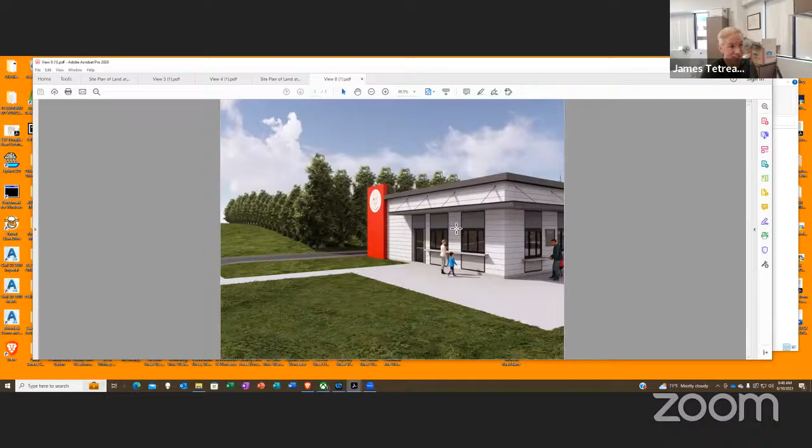This shows the building front and the sign. Windows will still be here, but this won't - where I'm circling the cursor - this won't be a pickup window. It's just going to be there for symmetry and appearance, since we don't want to encourage folks to be over on the drive-through side. This view is looking from the front, and this one is from just beyond where the drive-through is going to turn now, so you see the sign a little better and get a different perspective on the front.

On this picture, I'm going to jump in - aren't there supposed to be two windows on the left side of the red panel, or is it just going to be one? This is the drive-through window. Is there not one before that? I thought the original plans had two. No, I don't think that's the case. Okay, that's fine, just double checking.

Understand. So I can circle back to any of the other views if you'd like - I wish it looked like that.

Well, like there's no houses, it's a golf course in the background. That's lovely. I was noting the new Mount Northborough in the background, but nice, it's picturesque out in the farmland. Should put a couple of cows back there.

The folks out on Hudson Street don't realize that their lots have been filled in to a height of 100 feet. Is there any view from the East Main Street side from... Larry, was there one? I don't think there was one. No, everything was looking from the main road, just to show the plantings and what it will look like from the people who live on that side?

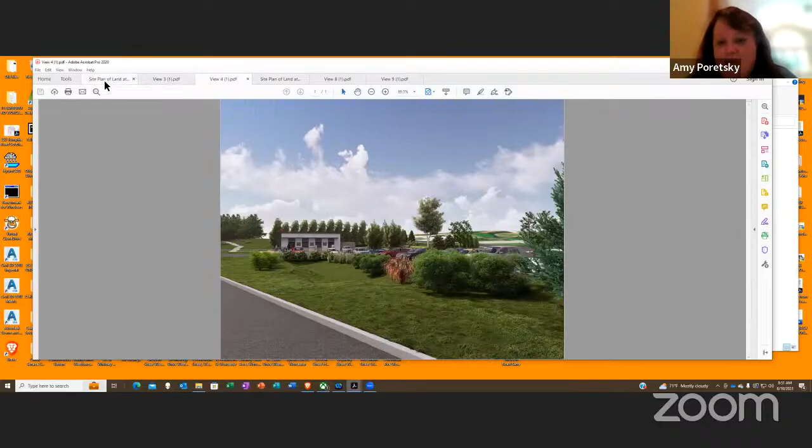Well, I do have a lot of comments. I like some of the changes that were made. Obviously it's smarter to keep your curb cuts separated.

First off, I'll do the handicap comments. So you've got 2 handicap parking spots in front of the building, and then when they come out to go to the picnic table, is the walk space going to have a step down? I would assume so, that the walk is handicap compliant, and then coming out onto the picnic area.

What did you say again? The materials that are going to be on, it's a paving stone walk, a 5-foot paving stone walk. Does a stone walk have these little spots in between them that the wheels can get caught? Because I know somebody with an electric wheelchair that's been having difficulty in many places lately getting caught.

Is that walk considered when you're going into the handicapped accessibility? That is considered, and I know there are different sorts of paving stone walks, some of which have fewer edges, let's say. That is the intention here, that this be done such that it's, yes, a paving stone walk, but it's almost a smooth surface, something that shouldn't be any difficulty for passage of a wheelchair.

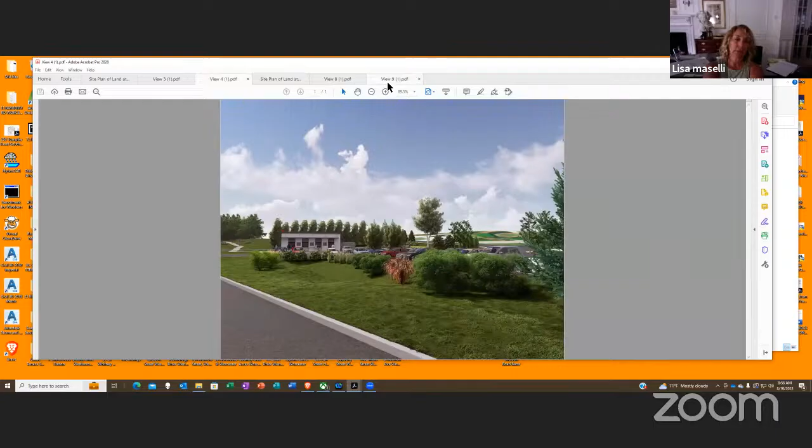Again, we're gonna go back to something we only touched on a little bit, but we still have a very modern building that looks like a Burger King or a Dunkin' Donuts, Burger King more likely, because many of the materials look like Burger King has them. We have made no attempt to make it more New Englandy. Is there a way that we can do something like that? Because this is very boxy, very modern, and that area doesn't... it should be what we've asked for in the master plan.

I wish Tom were here to speak in response. But we've actually, from the different meetings, I think we've got a pretty positive response to the style of this building. We showed these pictures at the ZBA, and one ZBA member was complaining it's not going to look that good, as his objection.

It's hard to say. I mean, you say New England, you got a whole variety of styles in this area, and I wish Tom were here to speak more specifically on this. But, James, this is Dario, I'll speak a little bit to that. We have a lot of variety of, we'll just say, old classic design, whether it's colonial or Cape or Victorian. This is none of those, so we can be pretty clear about that.

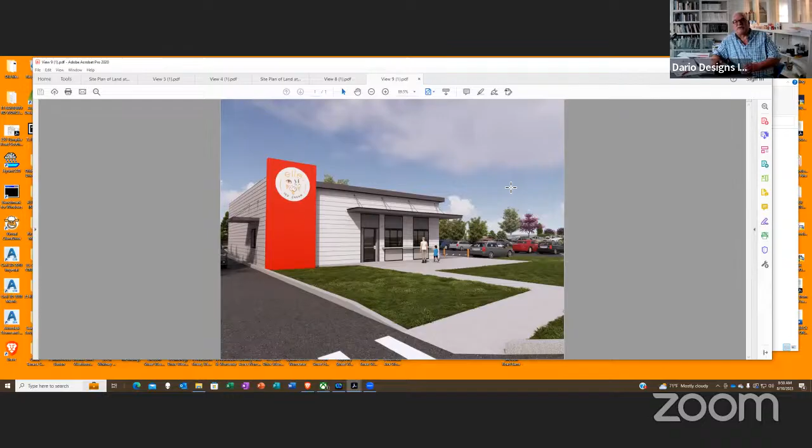And I think that's what we were hoping to get. If you looked at the old ice cream place just down the street from here, it's beautiful with all the pergolas and everything. And I'm not really asking for pergolas, but there's nowhere in any of the manuals that you'll find a building that looks like this in the sections of this is good, this is not good. So all the examples in both the master plan and design review committee guidelines do not show things like this.

Sure, I guess sort of devil's advocate question back on that is, was that expected to be exhaustive of everything that's acceptable? I mean, I'm just wondering if it's a little different. I'm not the architect. Not at all, James. It's not exhaustive, but when there's 20 examples that all look like 100-year-old buildings, and this isn't even close, then we're not saying copy those, but it's not close to anything there. That's the point.

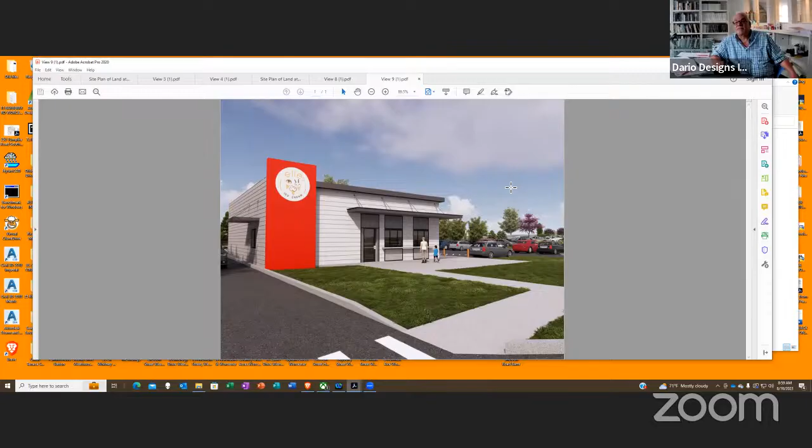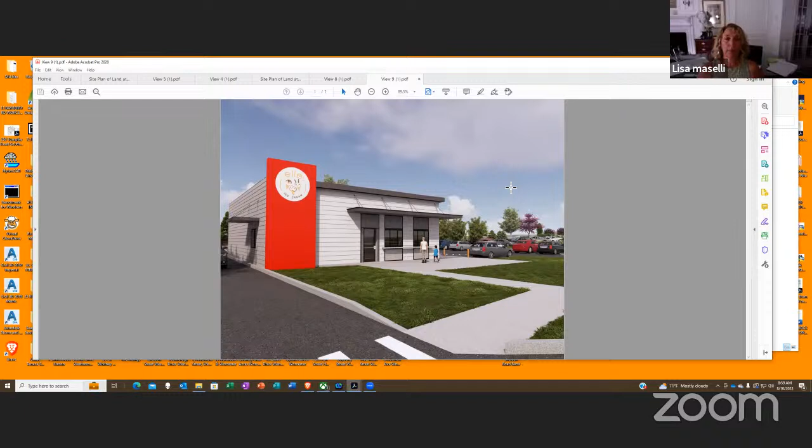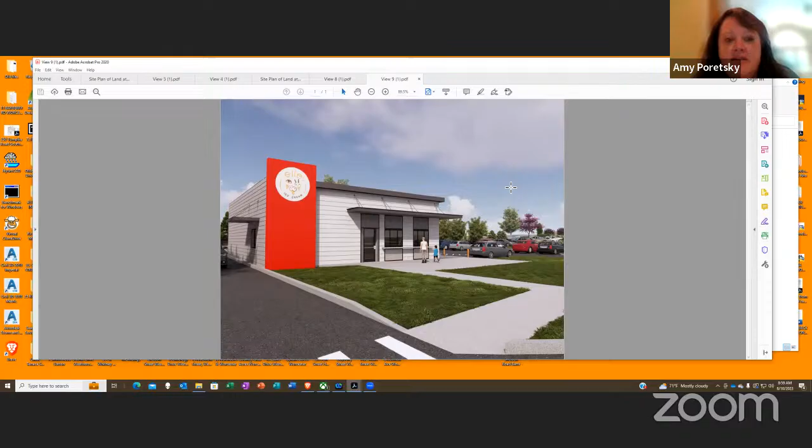Okay. Again, we'll pass along to Tom the comments. I wish he could be here to respond, but he's on vacation, I guess. You guys don't go back to the ZBA until August, right? It's September. Correct. So maybe Tom could come in September and talk to it, because I agree, this does look like a Burger King or a Wendy's, or even the way the canopy is very mechanical looking. It's not like... and very contemporary, modern.

It's a beautiful building. We like, there's no question it's a beautiful building, but it's so modern. The red just jumps out at you.

And in the location that it's at, which again is somewhat questionable, because you're coming from a stoplight if you're heading east, and that stoplight has 2 lanes that break down into one just in front of this. So in front of Bacon's, there's a double lane that goes into a single lane heading east. And people are trying to beat that light all the time. So the people who go into the right lane of those 2 straight lanes rush to get to that, to jump in front of the people in the regular lane. And there's not that much, it looks like there's 4 or 5 cars difference from the intersection to where you're going to be opening the ice cream.

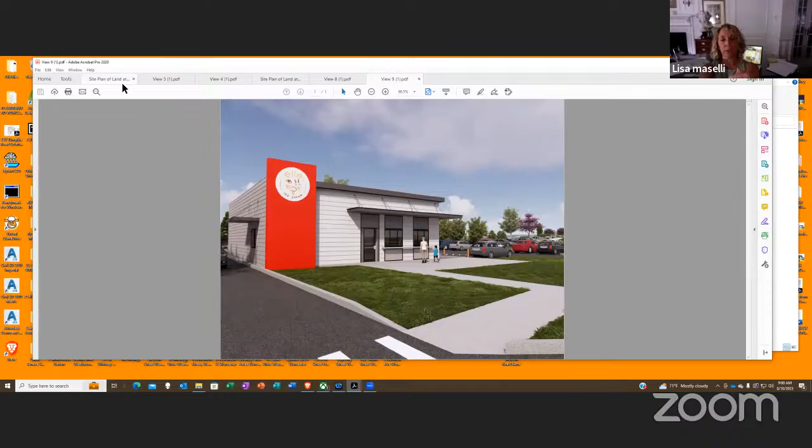So when you're looking here to there, the speed that people are picking up to come here, and if somebody's starting to come and decide, oh, I want to go have ice cream now, what happens to that line of traffic? The danger to the pedestrian walking or people driving is a concern as well. It's a very difficult area, because that's where trucks are coming into Bartlett Street, and you've got your large vehicles already hitting Bartlett Street with the curb. They roll over that sometimes. It's a very, very busy and dangerous intersection.

Understood. It's a site on Route 20, and that has its attendant concerns of the speed of traffic and where your access is relative to an intersection. That's why, both from feedback from boards and from our own traffic consultant, as I'm moving the cursor here, we took this drive-through exit away from here, because this is where there are still 2 lanes, and moved it so that the only entrance is, as you face the building now, the rightmost existing entrance, which is after the double lanes on each side.

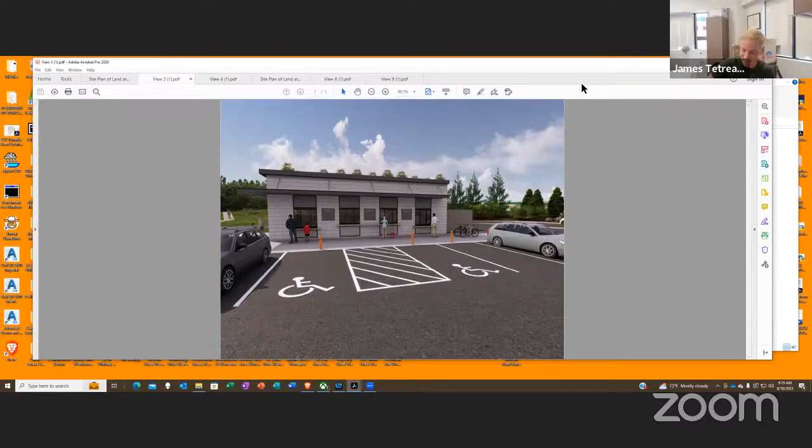James, I just have a couple things to say. One, with the order board, we're not going to minimize the ice cream menu at the drive-through. I don't want to discuss too much of how our operation works, but we're designed inside that kitchen to deliver everything you're going to order as fast as possible. And I don't disagree with Dario that everything is going to be custom made, but we have a system inside that expedites that delivery pretty quick. So we're pretty confident we can get that person in and out of the drive-through pretty quickly, regardless of the order they stack up for us. I'm sorry, I might have missed something else, did you have a question I missed? I had to hang up and call back to get the mic to work.

Sure, Sam, Dario was just raising the issue. The question had been asked, how is that going to be lit? We're looking at the east face of the building where the order and pickup window will be, and their menu boards, just blank squares are showing. The question was how is that going to be lit, and Dario was suggesting, well, if you had lighting from the soffit, it would light that but also wouldn't be seen from a distance.

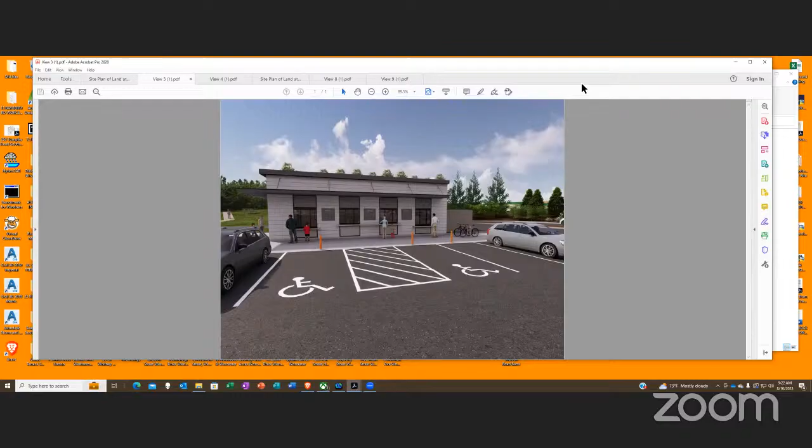I guess, are there going to be signs in the glass in the windows? Are they going to be specials, or 'come and get your Coca-Cola' like we've had a lot of lately? Or is the building going to be kept pretty clean? You won't see that, that's not our objective. The windows, like I said, the daily menu might get changed on the order board, but there will be no '$1.99 Coke and a...' We don't intend to do that.

I had a question about the parking. You notice the ones in the middle where there's no parking spaces, there's no bollard. I was wondering if we still should have a bollard there. I'm concerned, I drove around to other ice cream places like Yeoman's and Kimball's in Lancaster, and they don't have any cars that back up or park near where people stand in line. At Yeoman's, they actually have flower planter boxes there that block it, but they don't have spaces there. So it's concerning, it was brought up at the planning board that having cars facing where people are standing and ordering is an issue.

So, I'm looking at the one without the bollard. A car backing out from across the way could go right through there by mistake if someone steps on the wrong pedal. And would a bollard really stop a car? At the town common, someone drove right through the granite and got through it. I'm concerned with the spaces there.

Sure, I'm circling the cursor here over the hatched margin between the handicap spaces. We just didn't think we should put a bollard there, but we could put a couple of bollards and leave more than adequate width for a wheelchair while still being an adequate block for a car. We were trying to leave that hatched space between the handicap spots open for the handicap customer, but we could do additional bollards to block that.

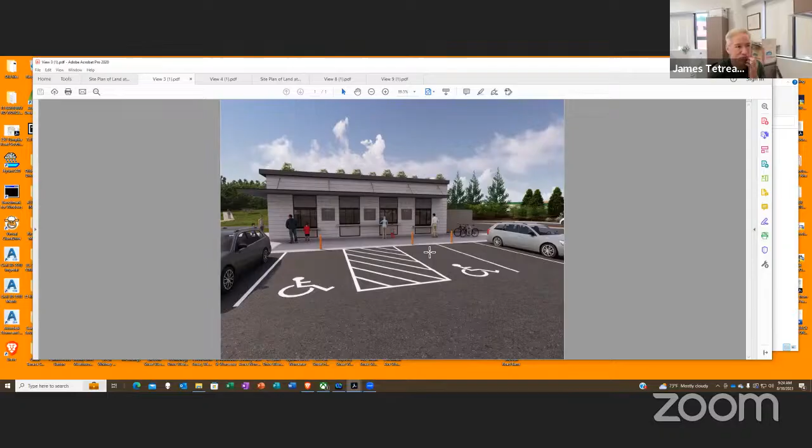Yeah, it's just concerning, do you need the spaces there? I looked at the drawings and I think you have, what, 34 spaces? I was wondering how many you needed. 30 now. In the course of changing the site plan — sorry, jumping up a couple sheets — in the course of moving the entrance onto East Main Street over, there were a couple of parking spaces here, 4 total, that we took out. So it was 34, now 30. How many are necessary, how many are mandated? It's actually on the basis of, because there's no seating inside for customers, it's on the basis of employees — our requirement is only something on the order of a dozen if you read the literal wording of the zoning bylaw.

Now, we don't think that's actually reasonable. We wanted to also make it easy, both for handicap customers and those who, while they might not have a handicap plate, are maybe having a tough time walking or don't want to walk very far, to have easy access to walk up and order. Can you bring back the picture for a second? Sorry, to the picture? Yeah.

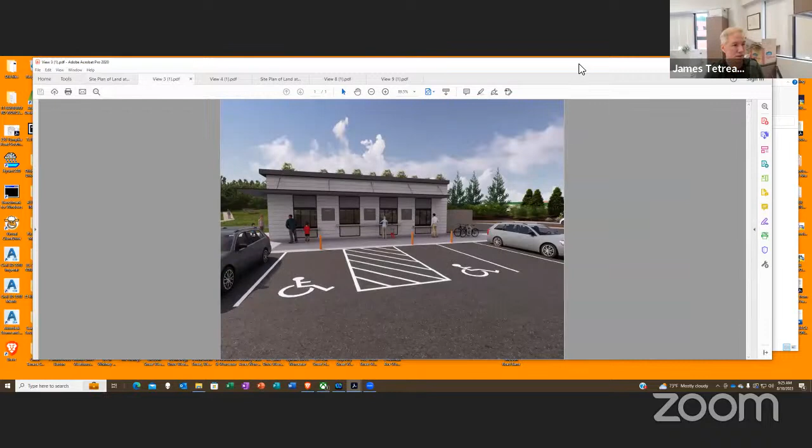I was wondering, could you put the handicapped spots on the side and not just in front of the lines? I'm a little concerned with cars parking right in front of the windows. What I'm not sure is what you mean by 'to the side.' Those 2 handicap spots I see, maybe they get pushed to the left and the right, so there's no parking in front of the ice cream window lines. I did drive around to a lot of ice cream places, which was fun to do, but I noticed that the ones I went to had no parking in front of where people stood in line.

I guess we could look into that. I hadn't really considered that.

If you check them out, I did try to check out quite a few to see what they did, and because sometimes even at Yeoman's, it's so popular the line goes really long, and it would go into the parking spaces. I just feel for safety reasons, you don't want to put cars pulling in where there are little kids standing, in and around the bollards.

I think that's a great idea. Maybe pushing those 2 spaces up to the north, right next to the crosswalk. But I've even seen people park in the lined area you're supposed to walk in, even at the post office. People just pull right into that, even though they're not supposed to.

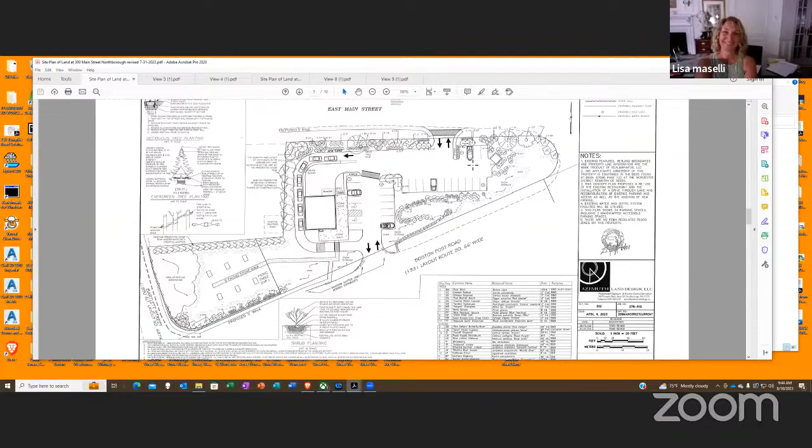So since you're going in front of the ZBA in September, would you plan on coming back to us in September also? Sure, answering the things that Lori had asked for in our letter and some of the changes we talked about today. I think building design is a big one. If you go back and talk to Tom Reardon, he must have a copy of the design review guidelines, and we have them online. He probably helped write them. Right, he did. So, yep, we will go back.

And what is the date of your meeting in September? The second Tuesday—oh, second. I mean, yeah, it's Thursday, sorry. Okay, I don't have it. Let's see... the 14th? Okay, September 14th.

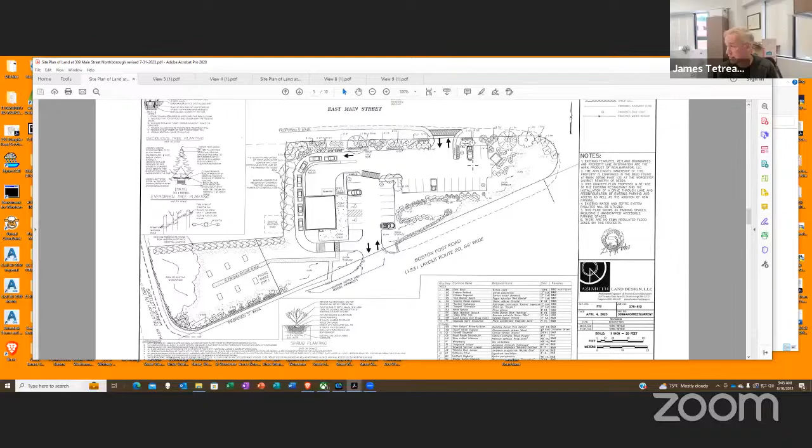Okay, we will take all the input we've gotten here, and we will try and address the things we can go straight to addressing. And if there's things where we have to see if there's maybe a way to strike a balance, we'll talk to Lori and staff, and we will try and give you a satisfying response on all these items.

Okay, all right, thank you so much. Thank you, folks have been great. Thank you. Thank you.

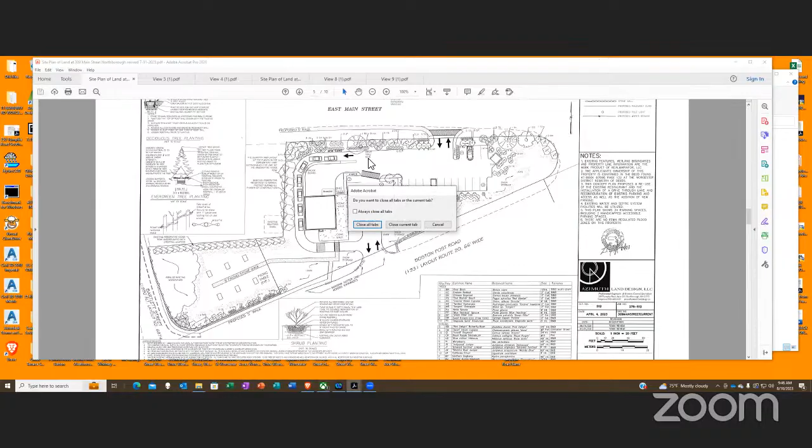Okay, so next on our agenda, we had two sets of minutes. Let me see, just going to pull it up. The first set of minutes were from June 14th, and Lori had sent out a copy with revisions yesterday.